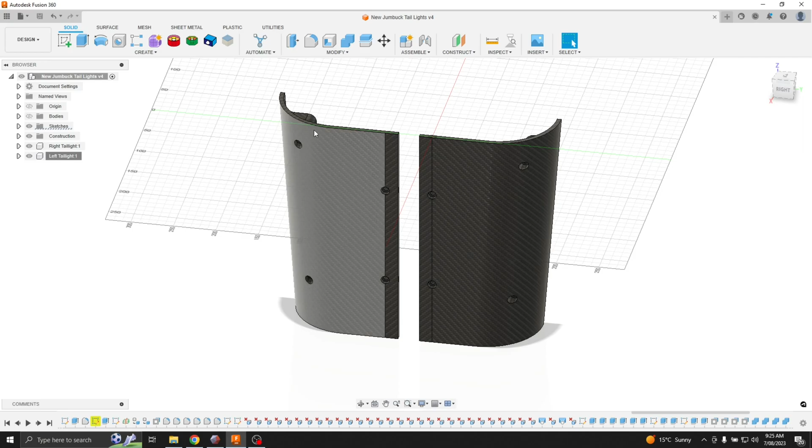Okay everyone, so I'm going to try and make this pretty simple. So I've created these tail lights, these housing covers, in Fusion 360.

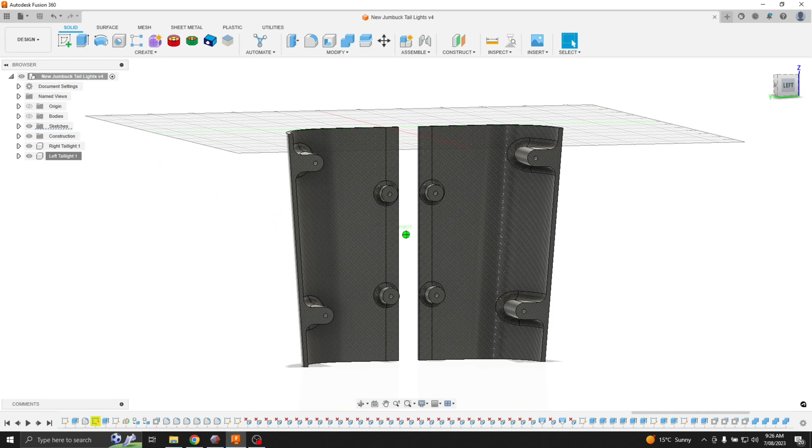After a few iterations I managed to get to this. So this is optimised for 3D printing. You get some nice little fillets there, make it look a bit nice.

You could also make a negative mould and cast this in resin or carbon fibre or whatever. I've made it look like carbon fibre here because, well, it looks nice.

So what we can do is go back in here, and obviously we want that to sit, what was our sizing? We want it to sit 30mm off. So we'll go to Construct here at the top, which gives us an offset plane.

And this is the front edge. I've made this specifically flat for this reason. We can offset - we want to go the width of the tail light off. So that makes us an offset plane here.

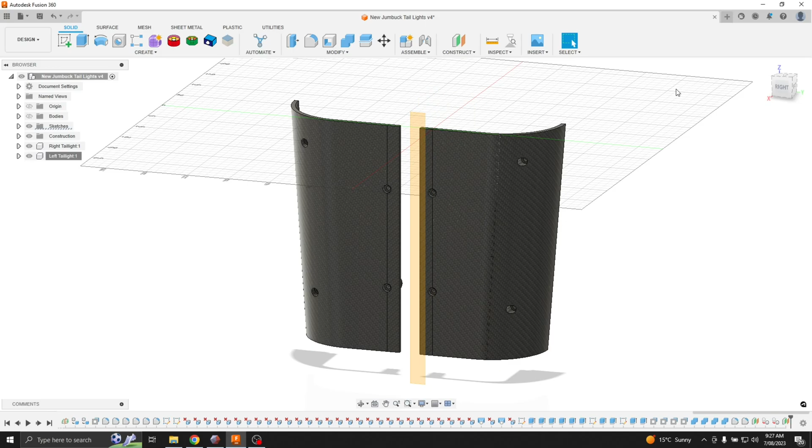So you can see that is now sitting just here, just off, and that would be 30mm. And we can actually click the Inspect button, and it gives us a distance over here of 30mm.

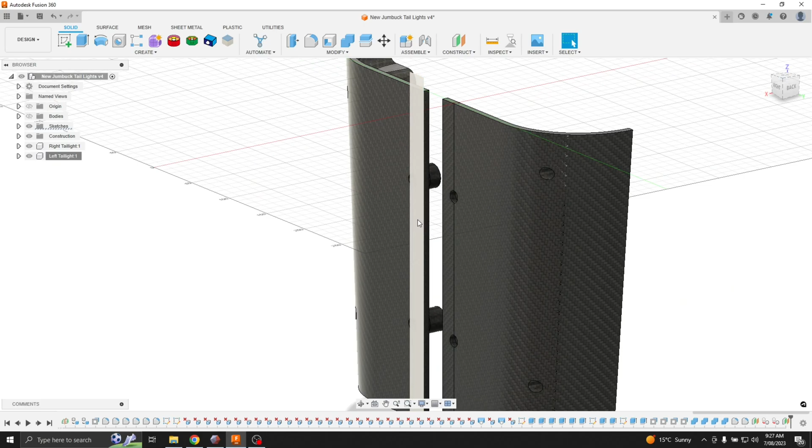Okay, so what we want to do is create a sketch, and we want to project - so you push P on your keyboard - we want to project these two faces, so they're your two tail lights.

Now here we've got a dot halfway between these, that is our centre line. So we can go from there to there, and then pick up our centre line there. That's our centre line of that, centre line of that, and then if we go halfway between those two, that is our actual centre.

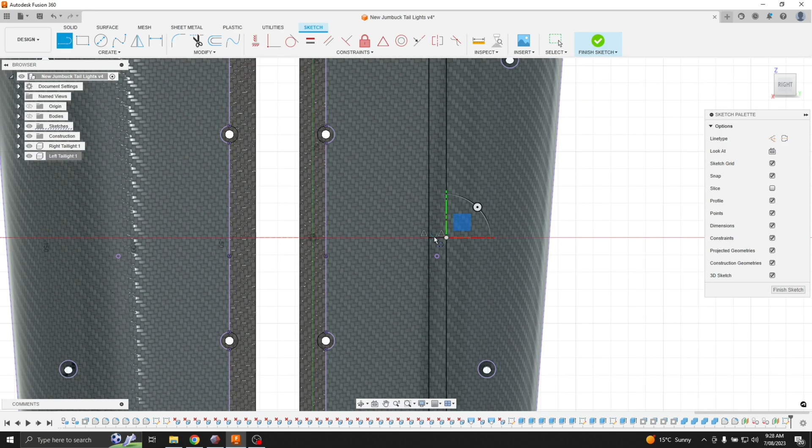So what we want to do is highlight all these, go over here to the right, and make these construction lines. So now they exist, but they won't really affect anything else we're doing.

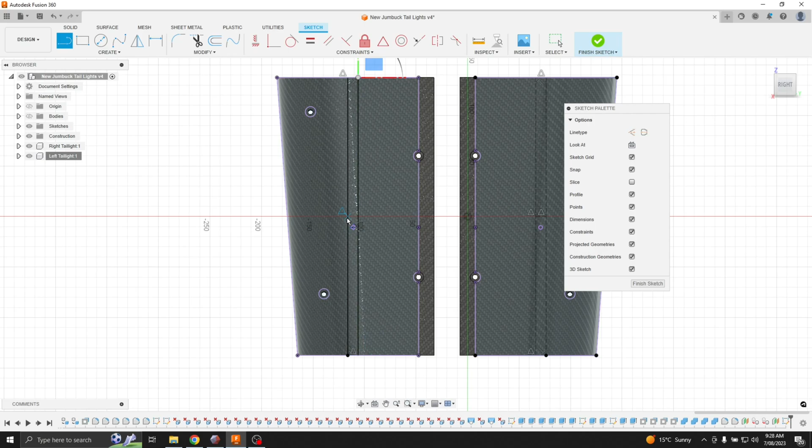And I'll just do the same on the other side. Centre of that one. Centre of that one. And centre of that. Okay.

Now we have construction lines and we know exactly where the centre of each tail light is. Now we're going to go back and say, okay, well that's 130 we're going to need for our actual light. So we'll push the C button on our keyboard and draw a 130mm circle.

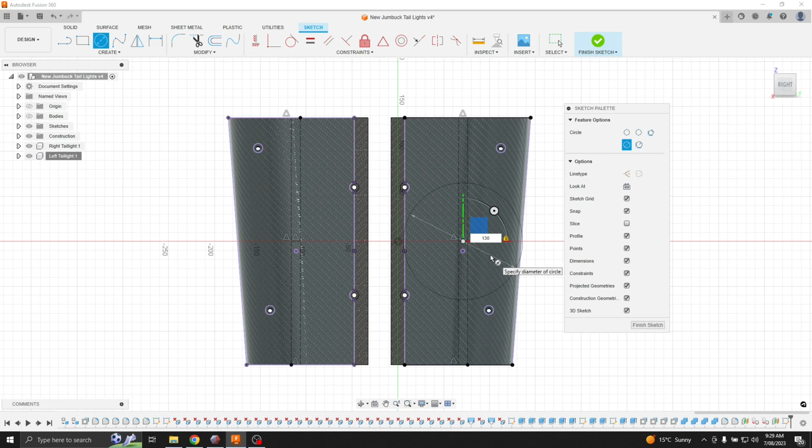Now immediately you can instantly see that is going to go past the very side of our tail light on the edge here, you can just see it. As you can see, that is actually wider than the car. So that won't work putting it there.

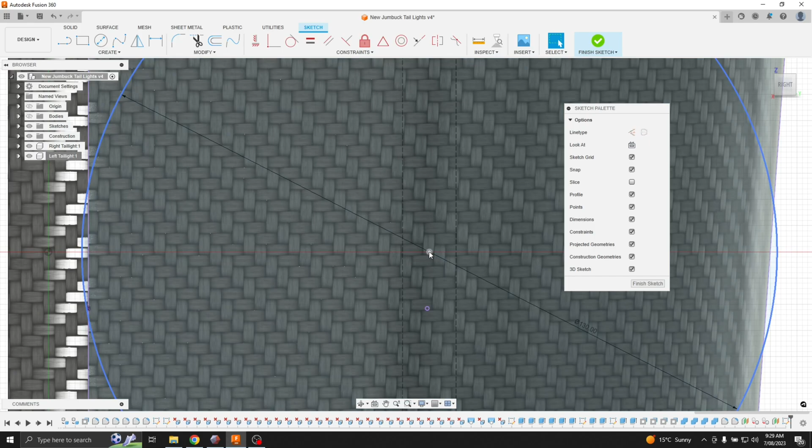Now, I think I've constrained that, so if I delete this line, I can now move this. I can go inwards - 5mm seems to work.

Or, if we really want to be pedantic, we can delete him. And we actually have - let's get a centre, so we'll get our centre here. I actually didn't put this line here. Project him there. Okay, we've got our centre of this line.

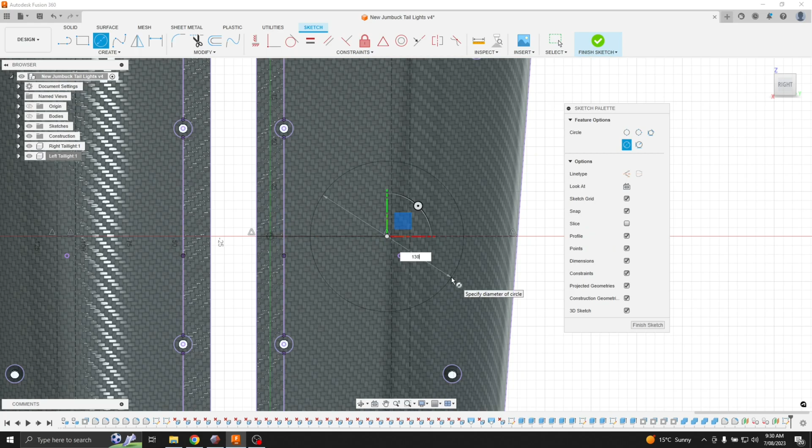Go to there, make him a construction. And we go back - we can go centre to the very edge of the actual object. Make him a construction as well. And then our centre will actually be there. 130, boom.

And now if I really want to be lazy, I can actually create a halfway between these two.

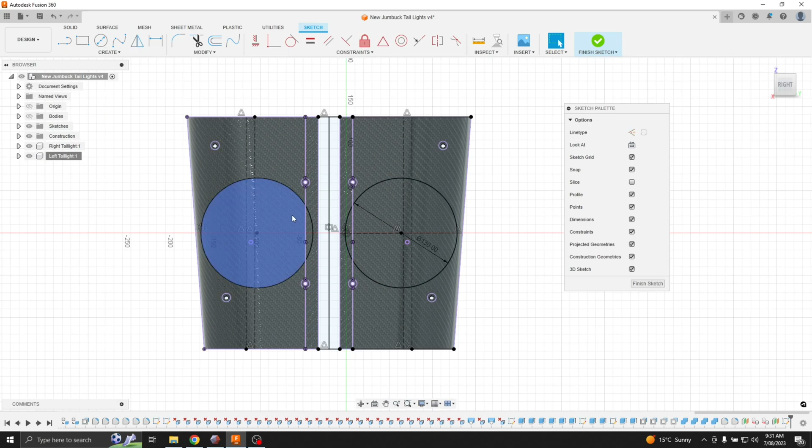And what I can actually do now is go create a mirror, select that, and mirror him over there. And now I have two perfectly mirrored these constructions.

Why didn't those become constructions? Construction?

Okay, two perfectly mirrored. Now that's the size of our actual tail light, so that is the minimum we want. Now the thing is that doesn't really help us, because if we try and make anything out of that right now, our tail light's not actually going to fit.

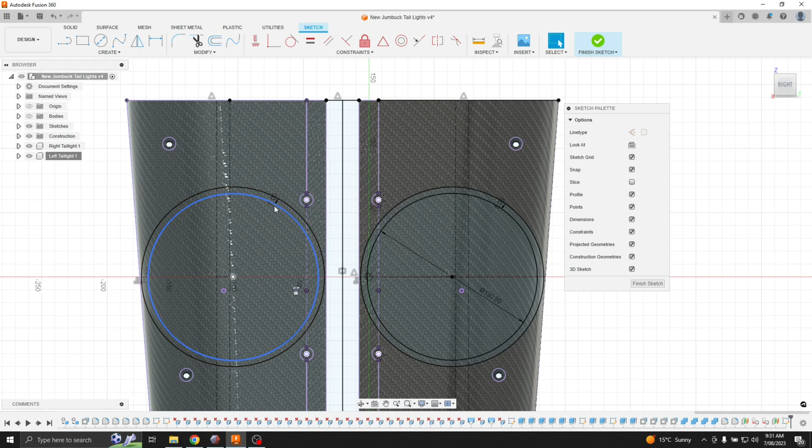So what we want to do is push O on our keyboard and offset that. Now I normally go about 5mm, because as you can see 5mm still fits into the whole thing. So we'll offset that by 5mm, and that doesn't interfere with anything, but it also gives us the space we need. So now everything exists on this flat plane here, and we need to now make this 3D.

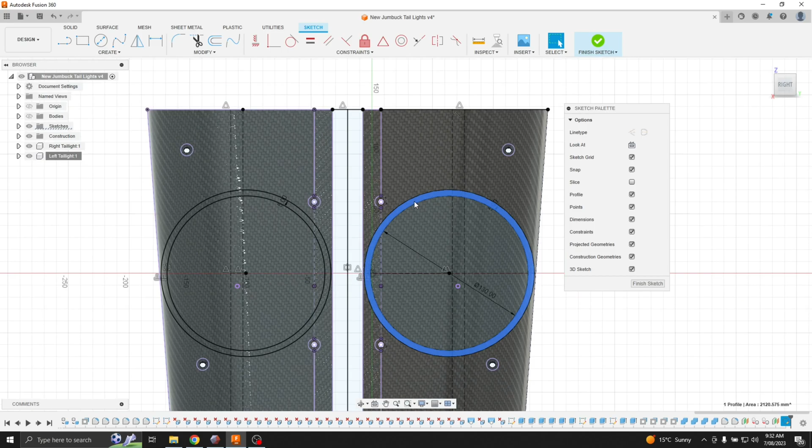So if we want to do that, we now go select this outer ring, push E on our keyboard. Over here in the extrude window, we go distance to object, and then we select the face.

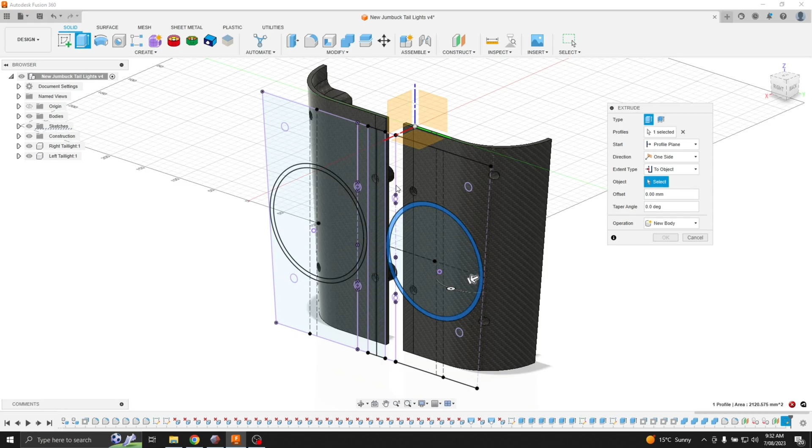Visible. Cannot complete extrusion, that's weird. Distance to object. Well, where did that go? It's created nothing. Oh, well, that's unusual. Right, can I extrude that one? Created not visible, wasn't it? Oh yeah, there we go. Now it's visible, okay.

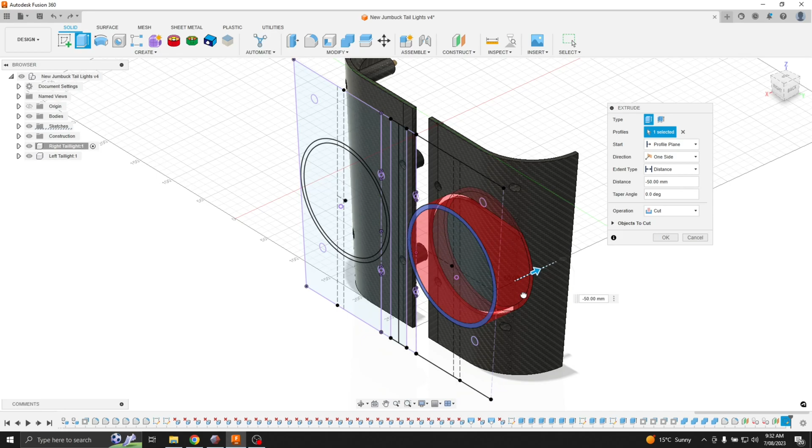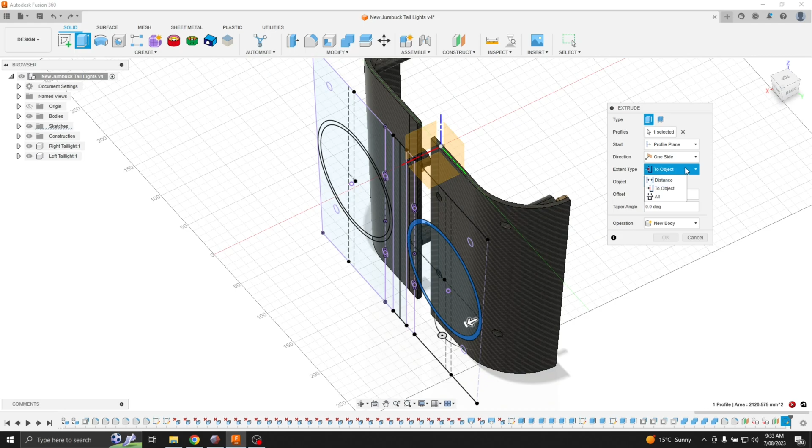It's weird why that, when I go to object, normally it should give more info. Boundary of selected body, select face or plane. Okay, that's weird, I've done this before, I literally did this just before. To object. And then it doesn't create anything. That is very unusual.

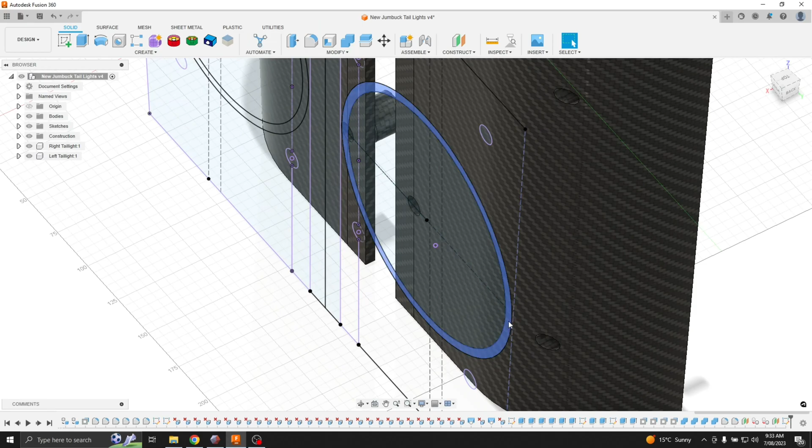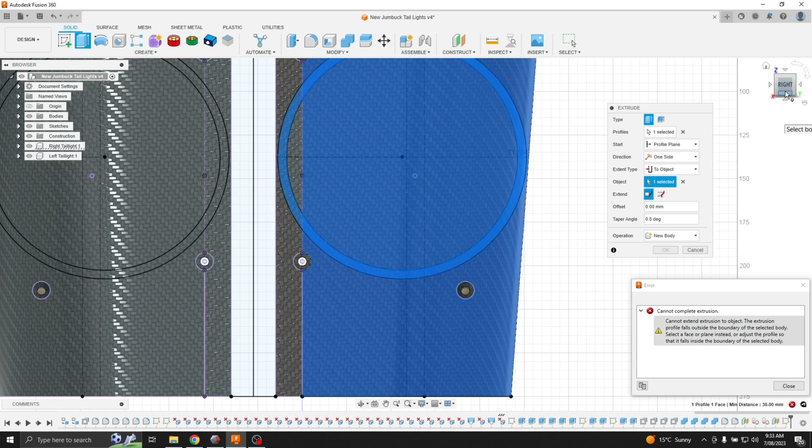Why does it keep making that invisible? That's so unusual. Because it won't fall outside any bounds of the selected body, it will just be in there. Okay, let us try doing that one. I'm going to go to Google. Unusual.

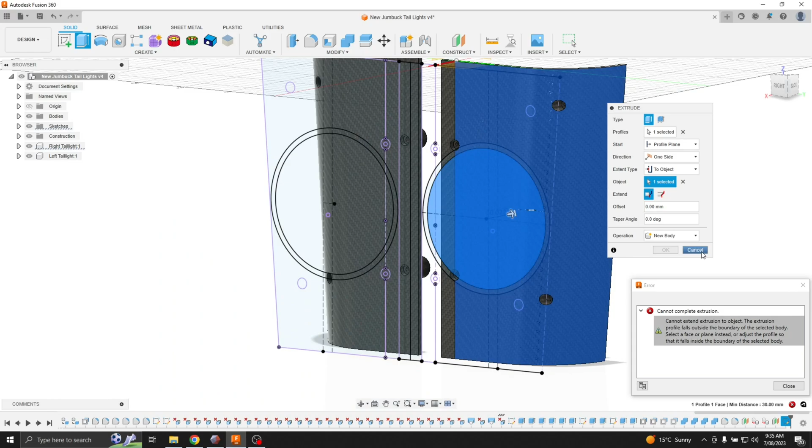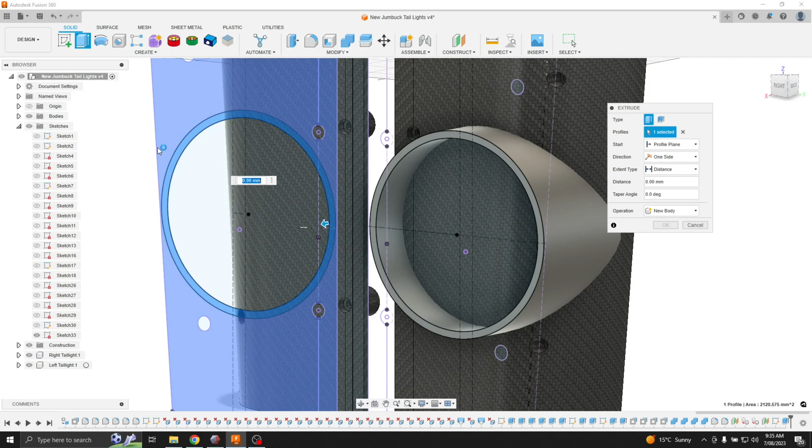So what you can do, to get around that, is create a new body, which gives you that. You do the same to turn the sketch back on. Do the same for the other side. Make sure it goes new body. Okay.

Now you'll get this ugly bit out the back here, which is fine. We can turn that sketch off now. What we can do is go combine, select that body, and cut it with this. I'm going to keep the tool low.

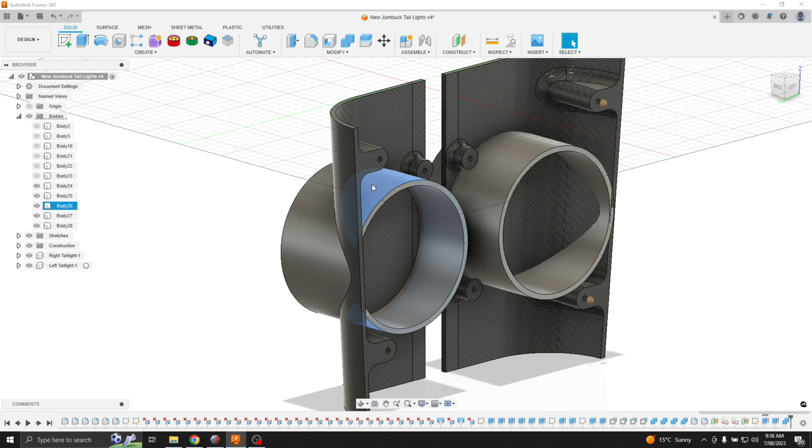Now we have this body here, which we can go in here. Body 26, turn him off. And now that gives us this one at the front here.

We can do the same to this one. 28, do the same to this one. Combine, which makes that our target body. Tool of that one, cut, keep the tool. And we turn off what is now 27. And that will give us these two at the front here.

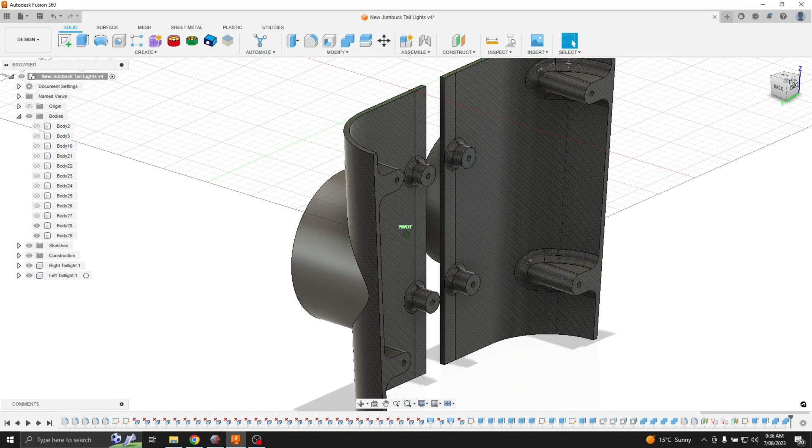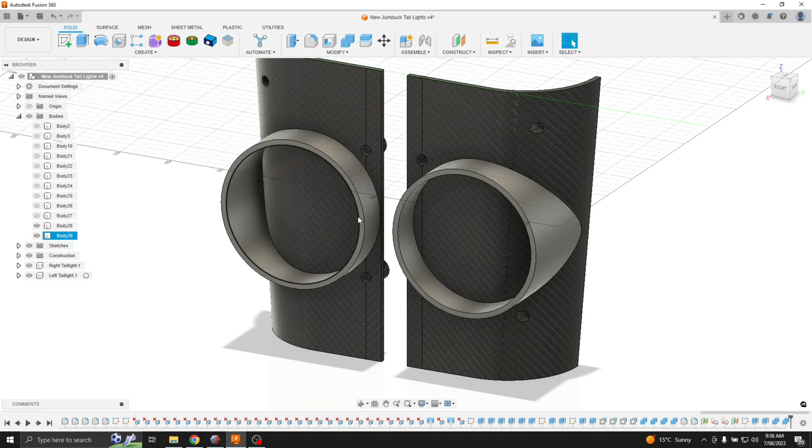Now, from here, we actually have a bit of a tail light starting to form. Now, if you really wanted to be pedantic, you could have made that solid all the way in through there. Some people do, some people don't.

Which actually, I might go back and do that, which is quite easy to change. So now we've got a solid face to actually mount our lights.

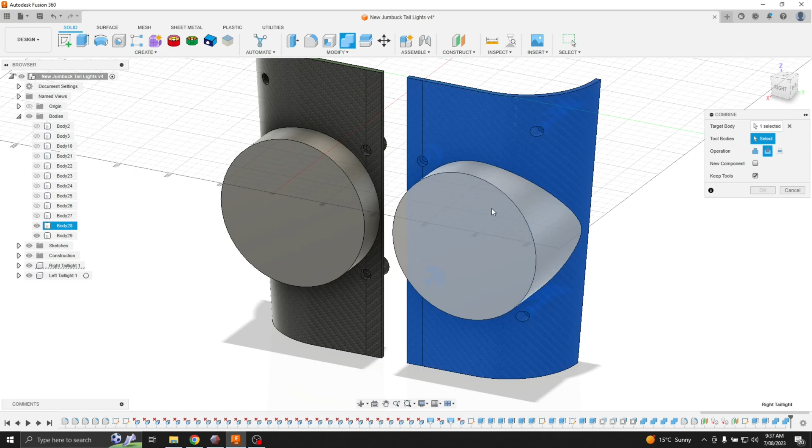Now, if we really want to, this is the point where we'd use that same combine tool, select them. We don't want to keep the tool anymore, so we just change it to join. And bam, now we have somewhere for our actual lights to mount.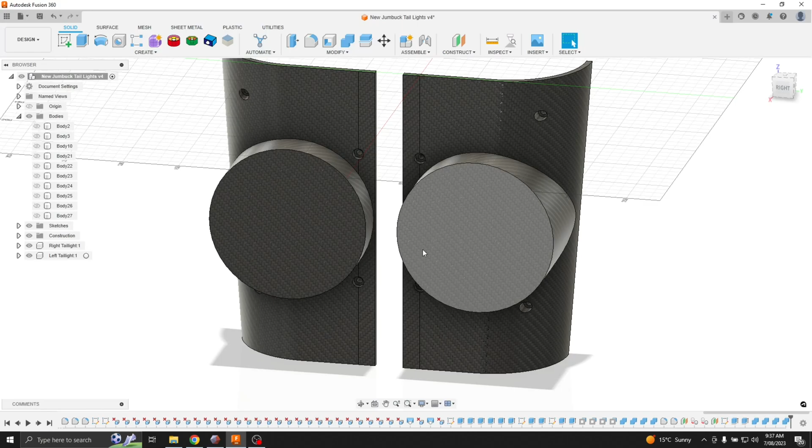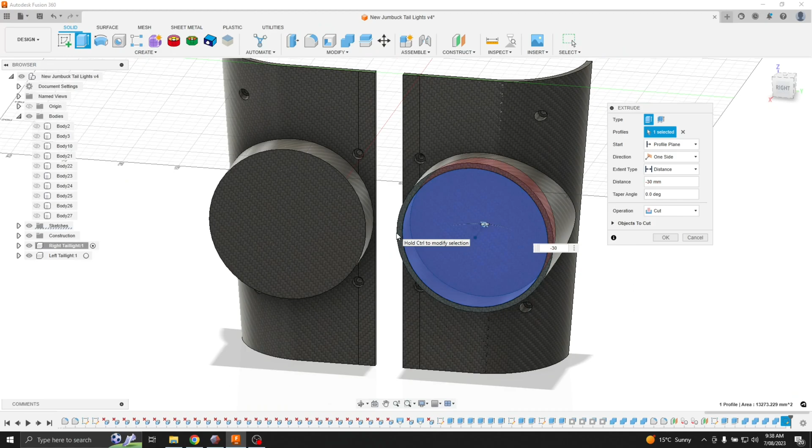Now what we would then do is, because remember we had that offset, these are 130mm here, and we offset at 5mm to make a wall. Now what we want to do is go back into Fusion, create a sketch, offset this -5mm, and then we know that the light is 30mm deep from the very front face. So we want to go back -30, and that will give us the actual depth of the light. Okay?

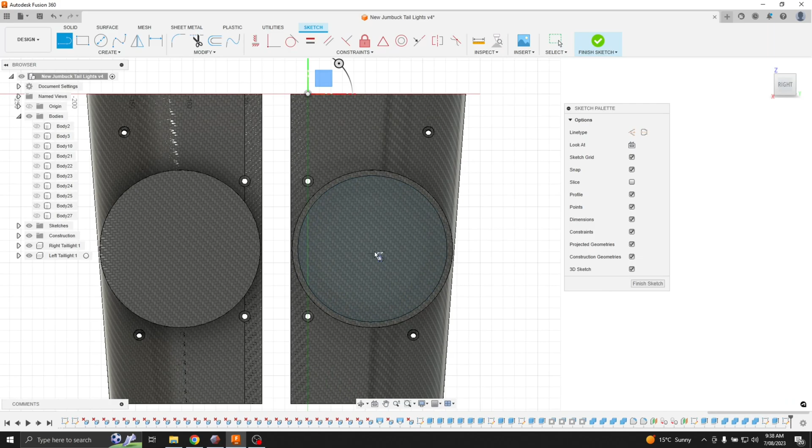Now we create another sketch in here. Going back here, 100mm spacing from the center, so 50mm aside, which will actually give you the center. Create a line, 50.

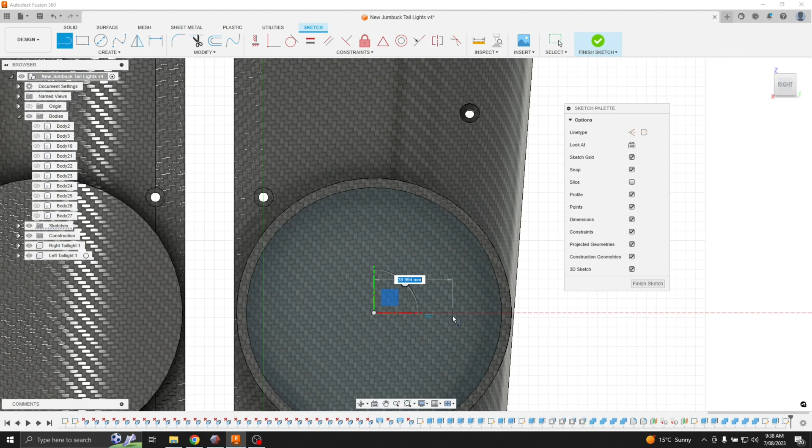Where did that go? I don't like it when it decides to do this. Create a sketch. Give me a line, 50. Sometimes Fusion does play up like this, which can be a pain. So now we've got 50mm each side of center, which gives us that 100mm spacing center to center.

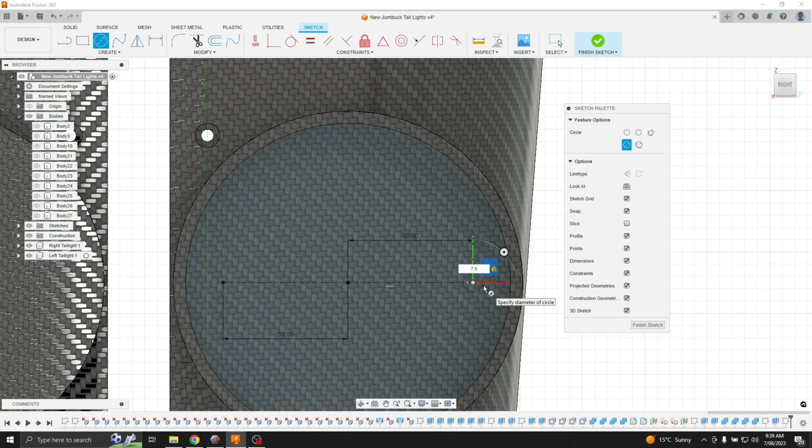So go back into Fusion. Again, we can make these construction lines just because that makes life easier. Now these will probably be around 5mm clearance, so you could actually go 7.5 just to give it a bit more, because if you actually look, it doesn't actually spec what size those holes are.

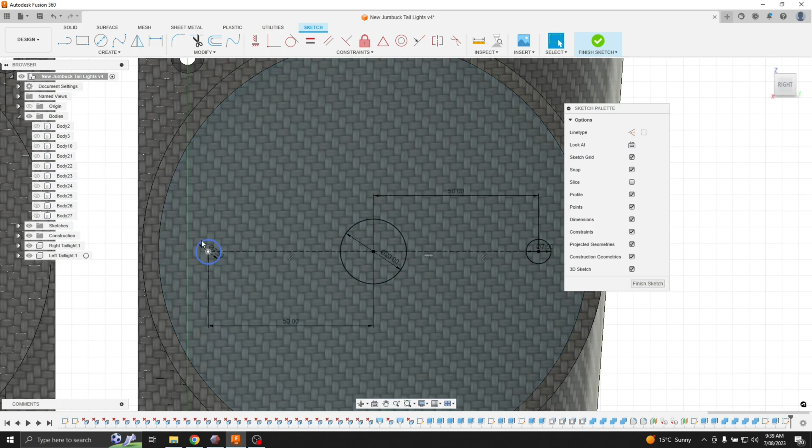But when you 3D print, it's going to not be absolutely accurate. Now the other thing is, it doesn't give you a size here, but you know that the wires are going through here. So what I like to do is give maybe a 15mm hole. Some people give a 20.

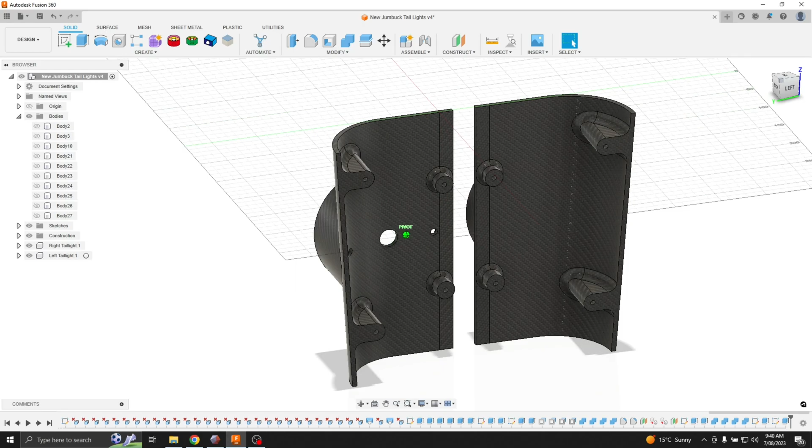So we've got our 3 holes for our tail light. We grab all 3 of those, hit the extrude again, and now we grab this arrow and just drag it back here. It doesn't matter how far, you just drag it straight back. Bang. That'll give us 3 holes from the back, which we can put our bolts through.

So our light will sit here, there's our holes, and then back here we have facings. Now as you can probably see straight away, this one's pretty flat, but this one here is like that. That is unacceptable, I can't really screw to a curved face. So what I would do, this is how I would fix this.

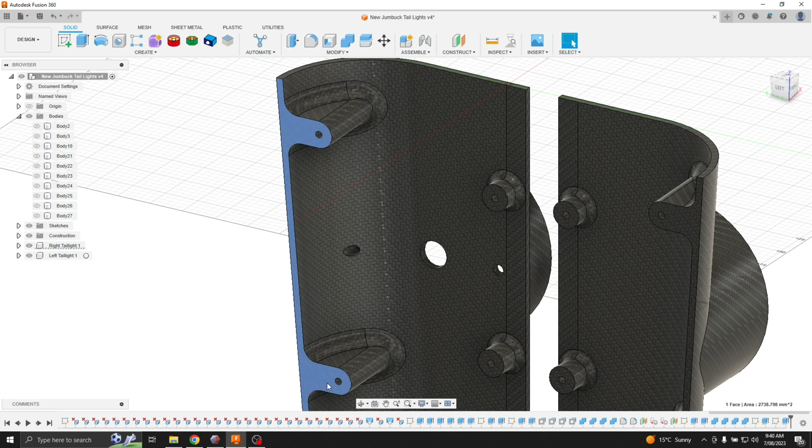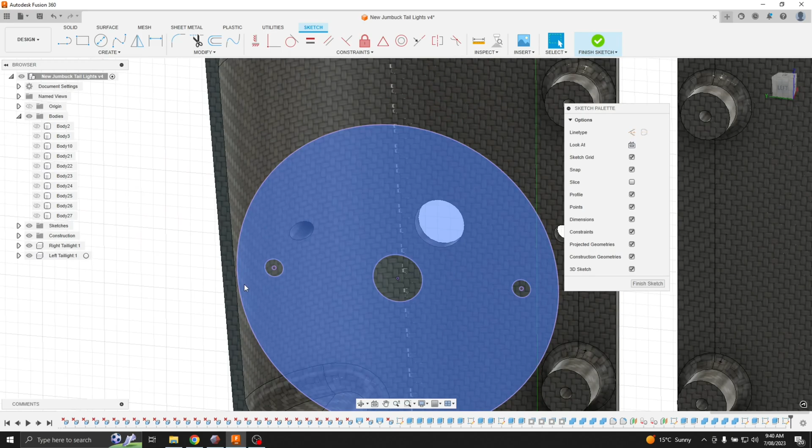I would create a sketch off here. I would then go back around the front here, and I would hit my P button, which gives me my projection. Project this back here, which gives me this same face on this side. So now I can see him.

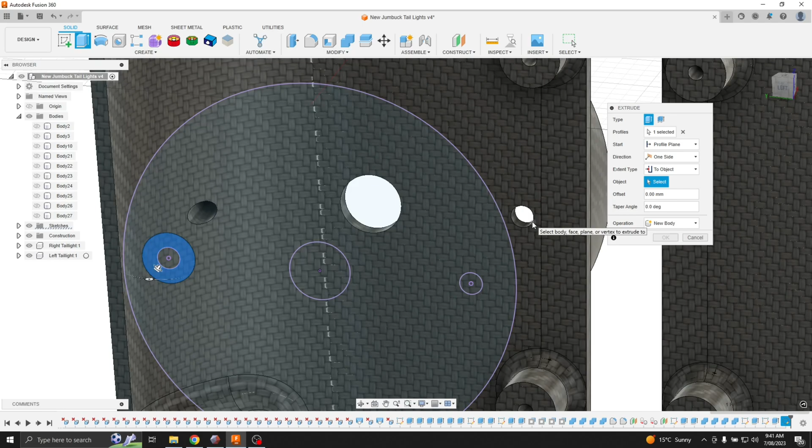And what I would do is offset this by say 5mm, which now gives me this big circle here, and I would go extrude, distance to object, and I want to pick up a point here. So you picked up a dot on this one, and now as you can see, I've got that weird thing, so I'm not going to do that.

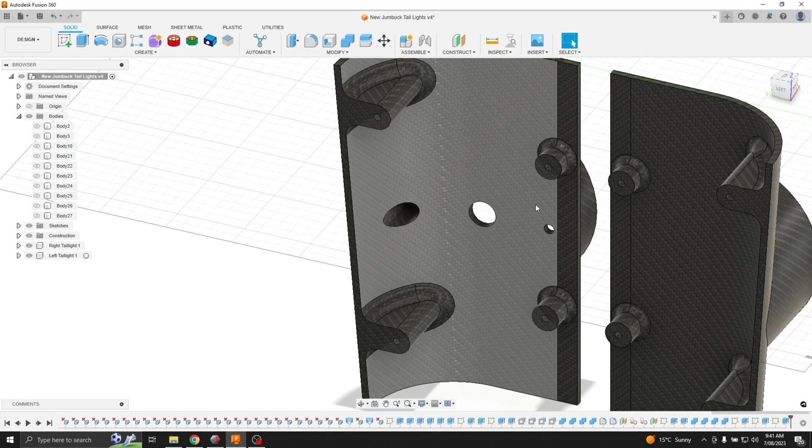I'm going to select the whole thing and do that same thing again. Find a point there, extrude, and now I have a flat point here and here. Well, that's not exactly flat, that's going to have a minor curve on it, but that's going to be flat enough to put a screw into.

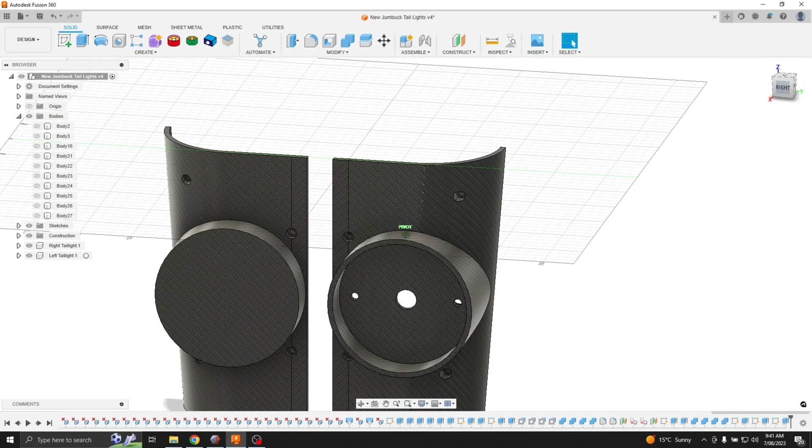This bit, on the other hand, is not. So you need to create that void there. And there you go, that is how you make it fit a tail light to the specs.

So we wanted to put this tail light in, and this one is even better because this also has the reflector, which is a legal requirement. So there you go. Now if you wanted to make this pretty, you could literally grab this edge here and this bit here, and hit the F button on your keyboard and make a fillet.

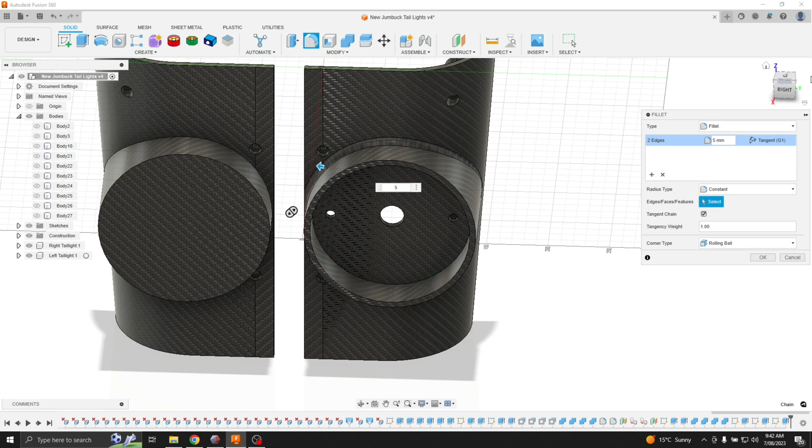So 5mm would give me that, which makes it blend just that little bit nicer. If not, you could just keep the step, it doesn't really affect anyone. It's your car, that's how you want to do it. But that is, in a nutshell, how you would make your tail light housing to suit.